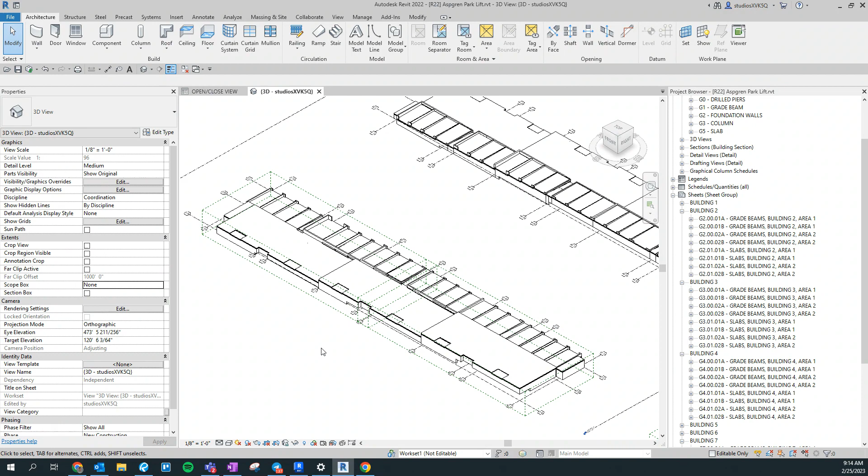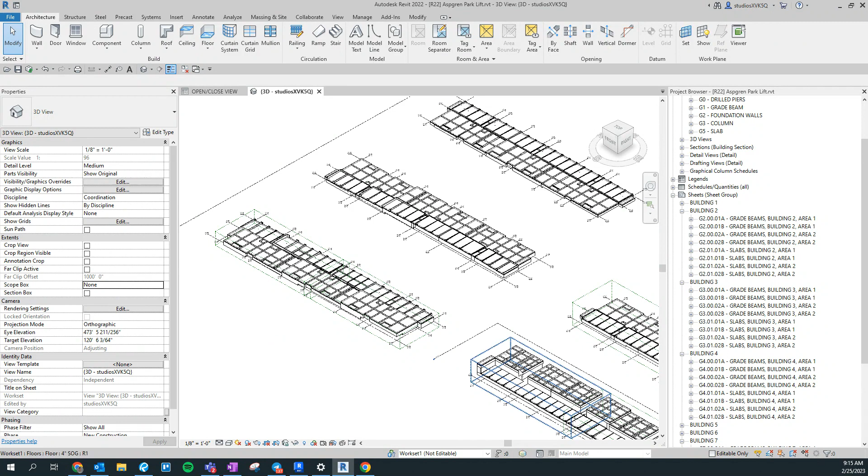So what we're going to be working on are these buildings that we like to call post-tension slab on grade with ribs. We've had a few projects where we've worked on these, but what tends to happen is that they're used at maybe apartment complexes where they're building a bunch of similar buildings, but based off site conditions like the ground level and how the soil slopes, there might need to be some differences.

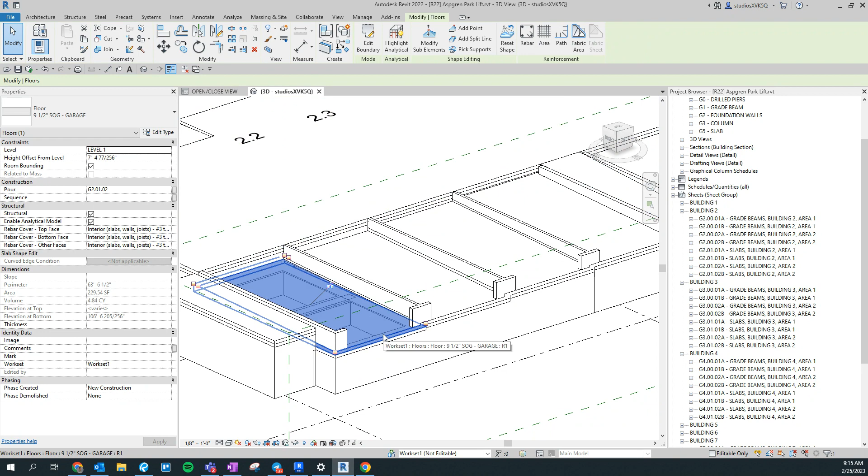So a project we worked on before was called Aspgren Park, and this gives you an idea of what some of these buildings might look like. What you can see here is usually there's a flat slab, and oftentimes it meets up with some sort of sloping slab. Usually what's happening is there's some sort of storefront, or probably in this case, ground floor apartments.

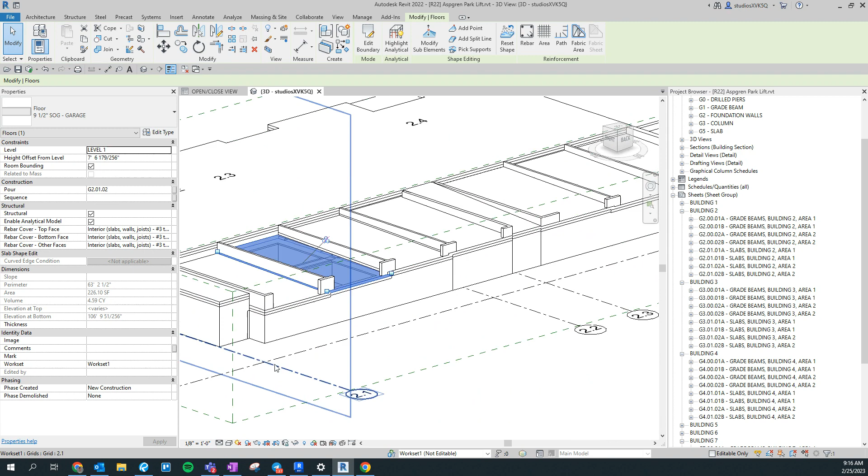But then what we have are these sloping slabs here, and these are for garages. You need to make sure, because there's oils and liquids in garages, that they're sloping. So usually you've got this flat slab and maybe it steps down to a garage, or maybe it slopes from the same place. So here it looks like it just kind of slopes from the same spot.

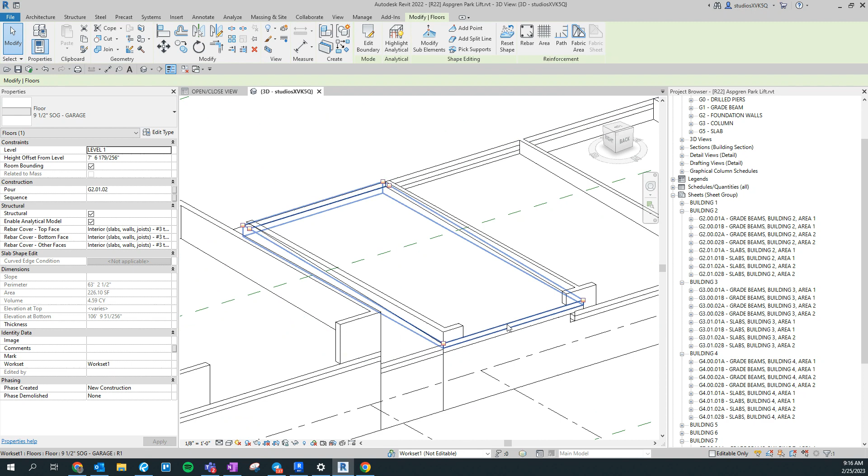Then what you end up having to have between those are curbs, say, between each garage. This can be a bit difficult to deal with, but essentially the purpose of the curb is that you want a wall on top of these to divide the garages into different pieces or rooms and spaces. But you need a flat area for that wall to sit on, so we put a curb in here.

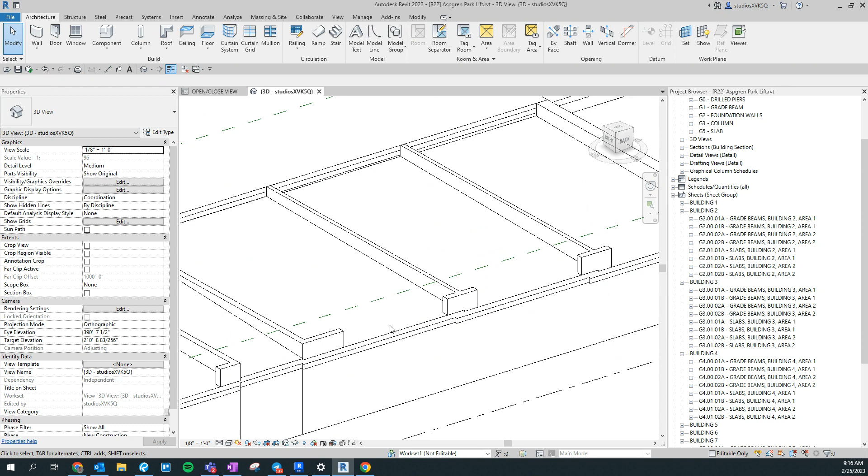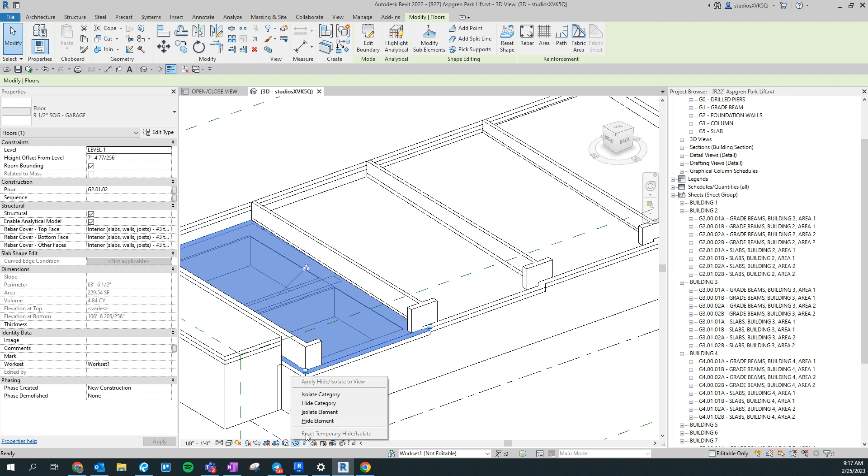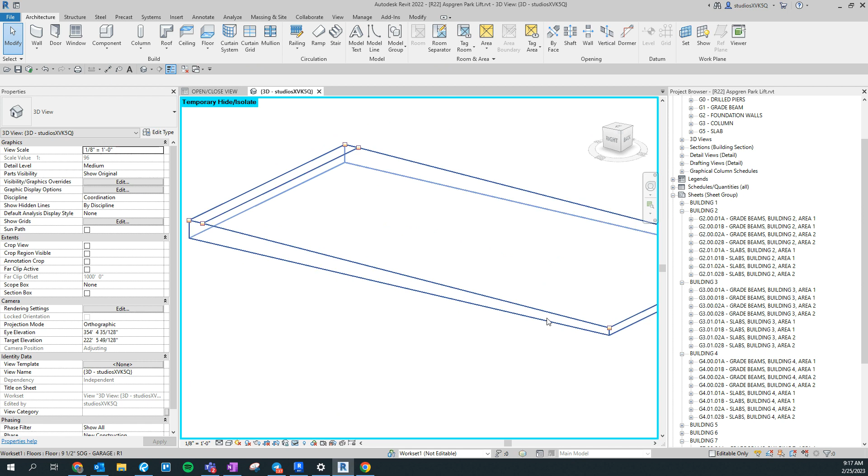Now, depending on the complexity of the building, what we had in this case was a slab of varying thickness, because we had a bunch of ribs underneath. Let me show you what I mean. If we isolate this element, we can see this is a lot thicker than it is over here. Usually the structural engineer will specify some minimum thickness, and that's this thickness right here. Then, in order to make the building easier to construct, we'll actually make the bottom of it flat and the top of it sloping.

Now, that's not always necessary. In the case of the building we're going to be working on here, Wesley Townhomes, it's not necessary, and we're going to have a non-variable, consistent thickness to our sloping slab here. But I do want to show you that this is something we often have to do.

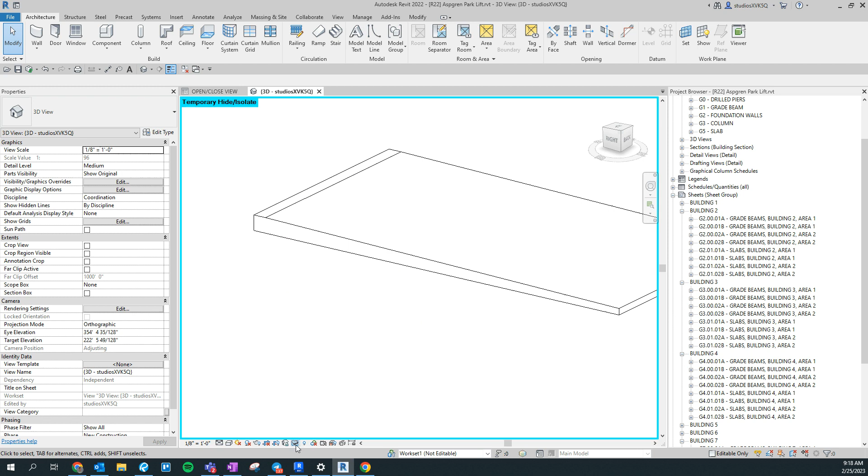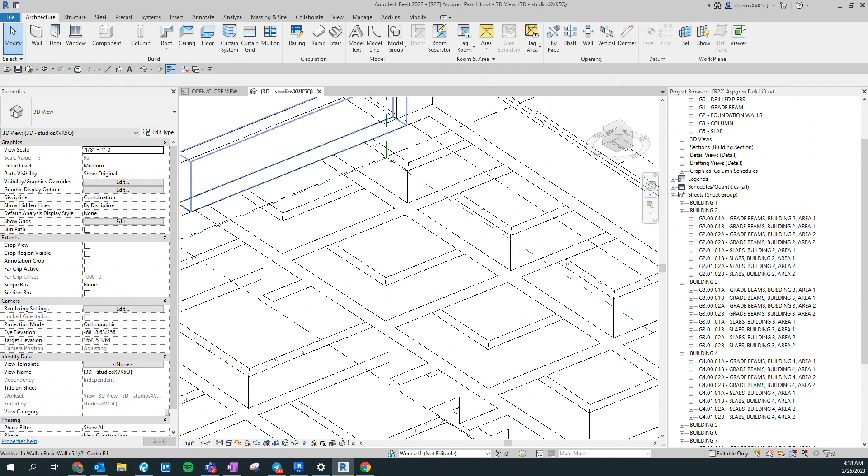The reason we did it for this job is because there's a large network of grade beams, ribs, and everything like that underneath. So if we tried to slope everything, we'd have all these ribs at varying heights on top, and it might be really difficult to pour.

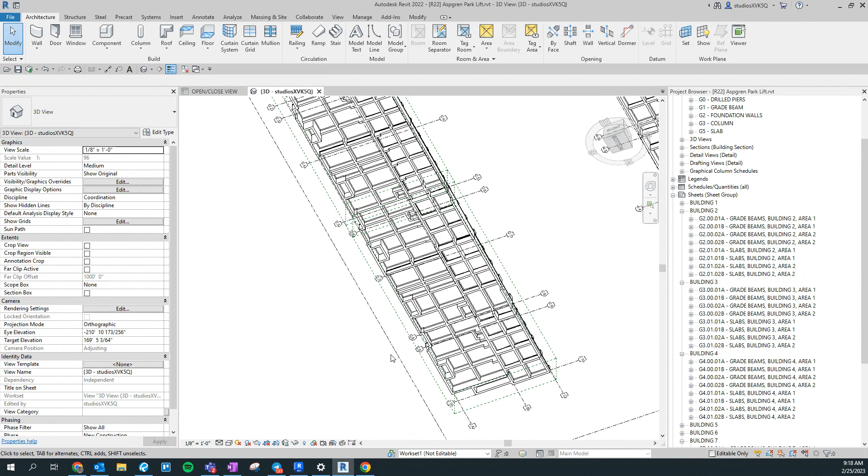It takes a lot of time and energy to do. So in this case, because we have a lot of interior ribs, by the way, we call these ribs on the interior rather than grade beams. I think it's because they make up a big network of grade beams and support. And because they're post-tensioned as well, they put some cabling in there, and the idea is it makes it a lot stronger. We don't need to go into the whole background of post-tensioning and the engineering aspect of all that.

So you can see we have jobs that are like this. We have curbs here. Maybe we'll get steps in the slab, sometimes big steps in the slab. Here, maybe it'd be easier to see if we make this shaded. Yeah, that's a little bit easier to see.

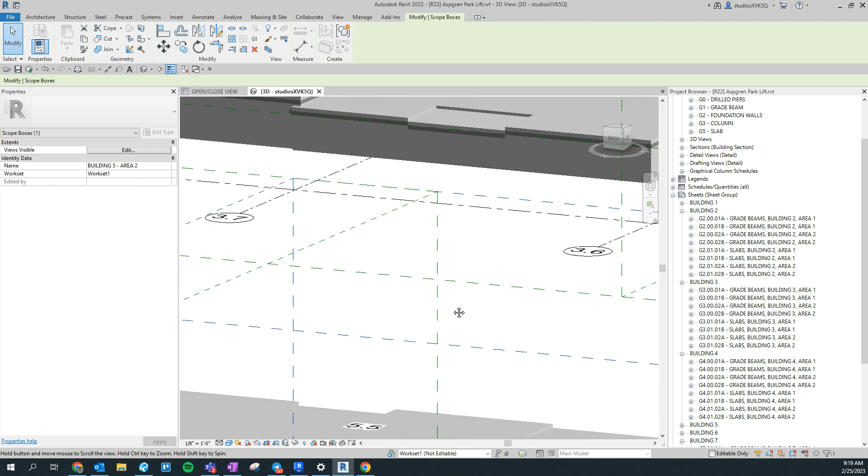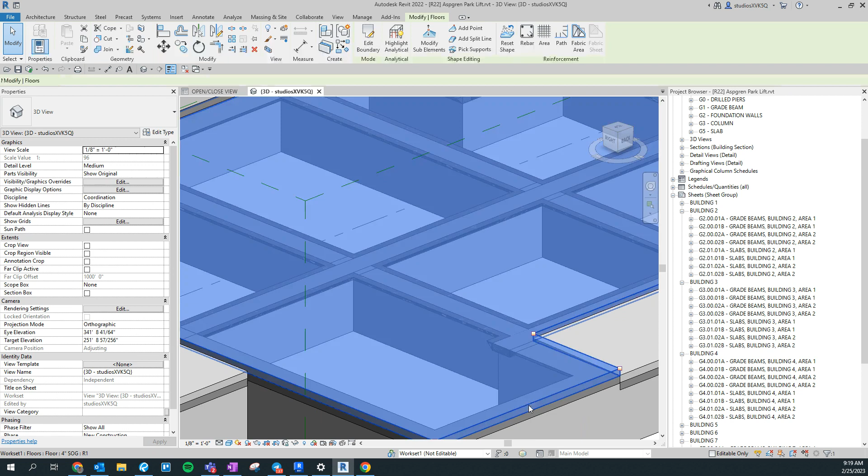One of the other big things we have is underneath the slab, what you can see are these little areas right here, like what I'm selecting at the moment. These are thickened slabs. The purpose is that we don't want the slab, at its thickness - I think the slab is 4 inches thick - to sit directly onto the grade beam, where you've got like a 90-degree transition at the grade beam.

So what you can see that we do, let's go ahead and select one of these grade beams as well, just to isolate these.

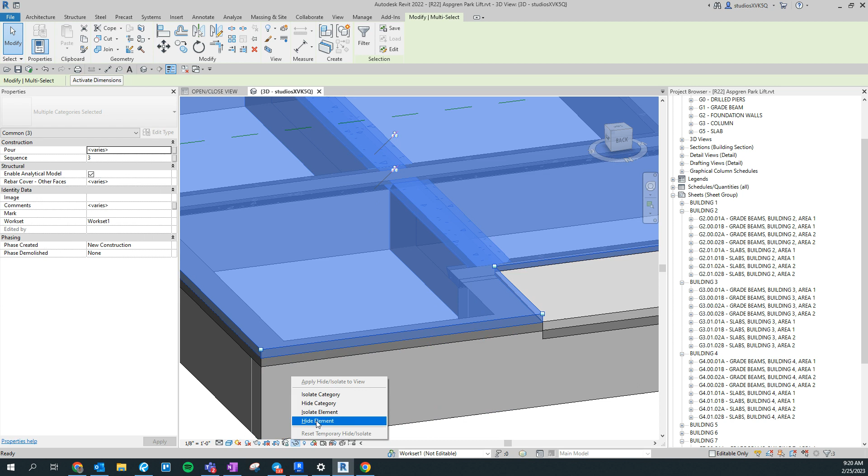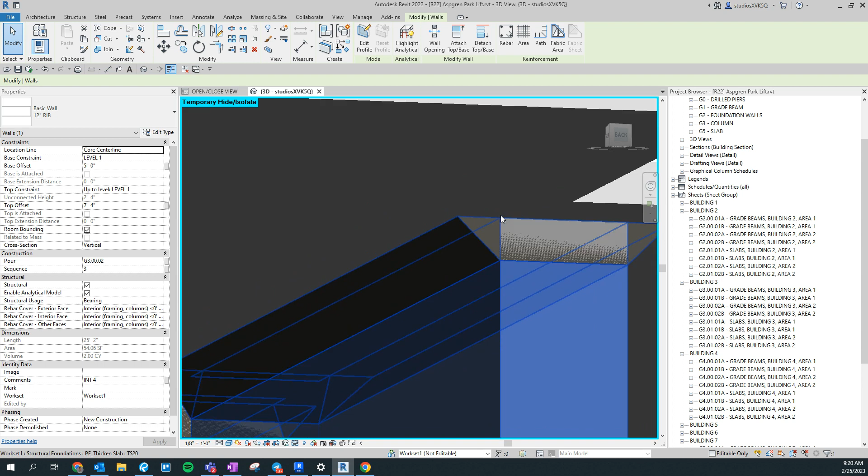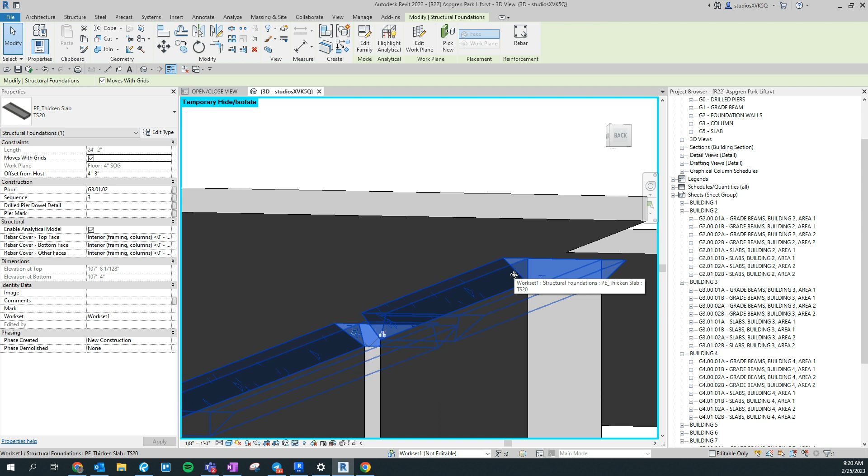So what you can see that we do is we have a little trapezoidal or triangular section, and this is poured with the slab. This is about making the connection between the rib and the slab stronger. Because if you do a 90-degree connection, if you have a background in structural engineering, you'll know this creates what's called a stress concentration, and it can break a lot easier. But when we make it a 45-degree angle, it's a lot better. Actually, the best way is to have a curve, but that's extremely difficult to pour. So this is a good way to get it done and still keep it strong.

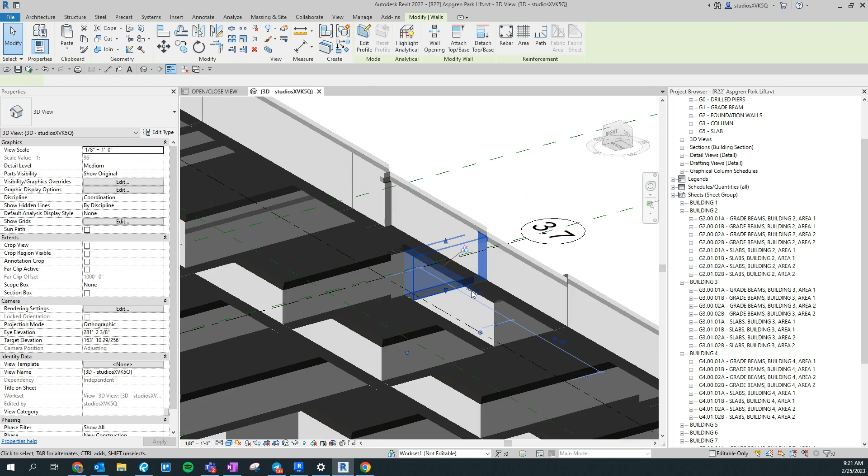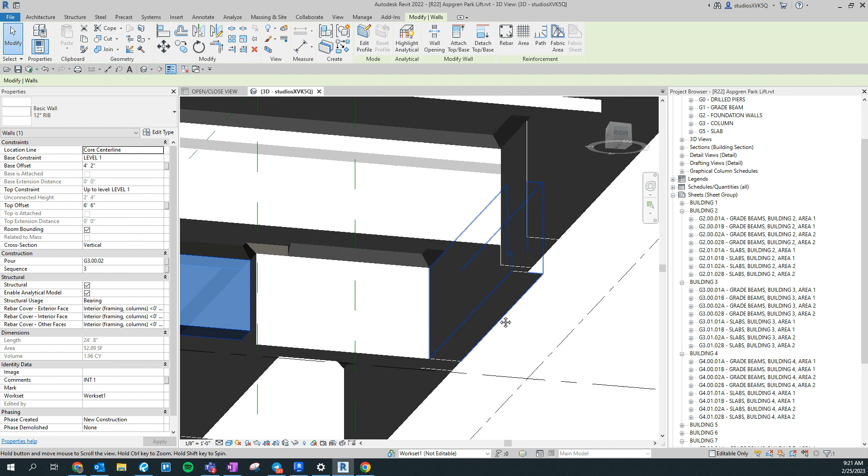So this is the general setup of these systems. And there's one other thing I want us to take a look at. What you'll notice in some of these places is that these interior ribs are not as deep as the exterior ribs. So the ones on the inside are not as deep as the ones on the outside. Sometimes they match up, or in certain places we make a few of the interior ones as deep, but you can see there is this interior one that steps down. So this depth of rib is needed for the structural strength, and to actually make everything strong, this is all that's needed.

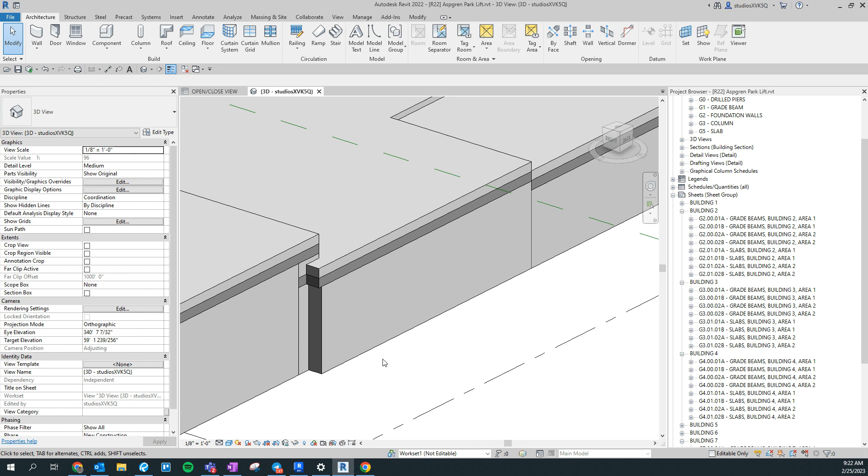But when we're especially farther in the northern hemisphere, in places where we have to deal with snow and frost and really freezing temperatures, one of the things we have to worry about is what's called frost. Frost is basically when the ground freezes. The problem is the ground will freeze and thaw and freeze and thaw, and it will push our structure. If it's not deep enough, it'll push our structure up out of the ground a little bit here and there. And as we know about concrete, if it moves a little bit, it's going to start to break, and we're going to get cracks and lose our strength, structurally speaking.

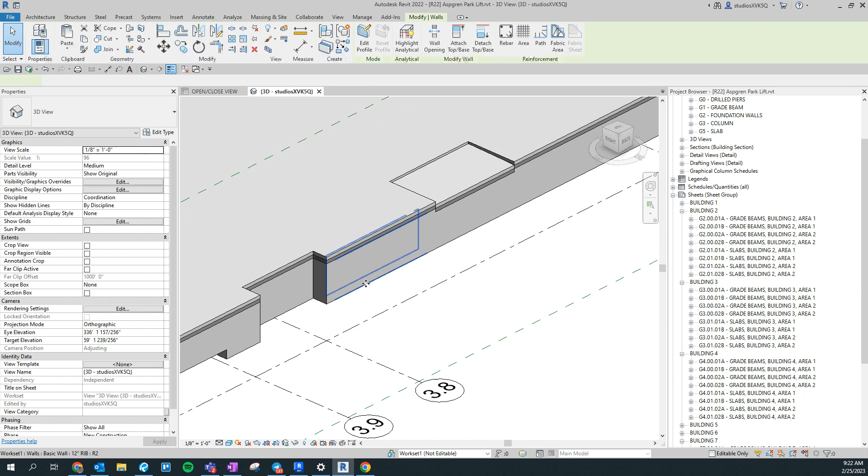So what we do to combat that is on these areas that are on the outside, close enough to the outside of the building where they have to worry about the freezing and thawing and the frost, we make them deeper so they can reach that frost depth. Usually that depth is about 3 foot, or at least 3 foot, maybe 3 foot six, depending on the area and the design by the civil engineer or structural engineer. Usually that's 3 foot six below what the grade is. And let's remember that grade is where the soil is, not necessarily the top of the slab. It might be, but not necessarily.

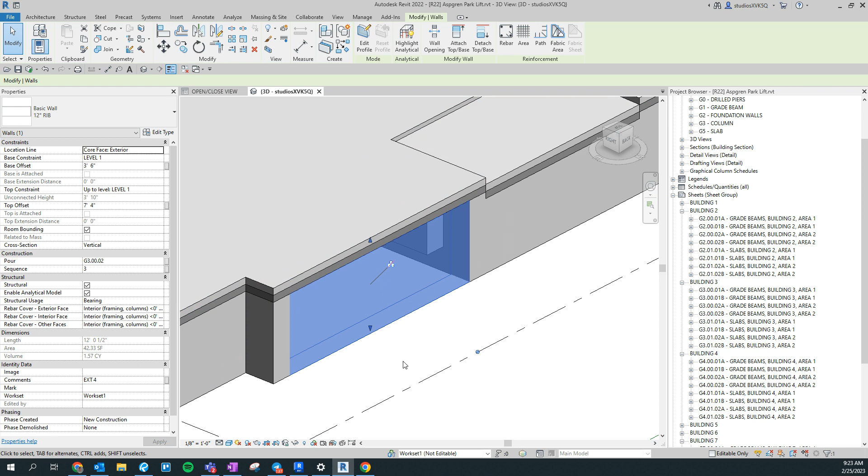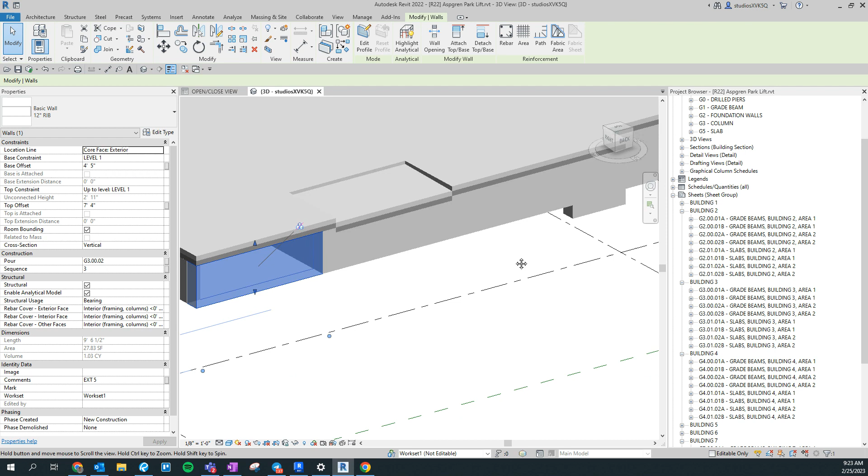So we usually have to get this at least 3 foot, or 3 foot six below grade, below where that soil is. And it's better to be a little conservative and have some extra space there. So even if the grade is up really high, it's better to have a flat bottom because it's a lot easier and cheaper to construct than to slope the bottom with the grade. So as a summary, interior ribs are usually not as deep as exterior ribs because the exterior ribs have to protect the interior ones and all the structure inside from frost and freezing.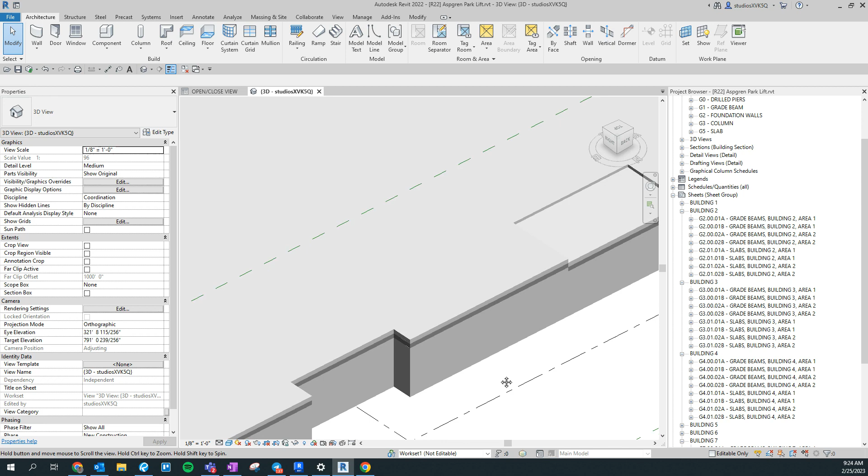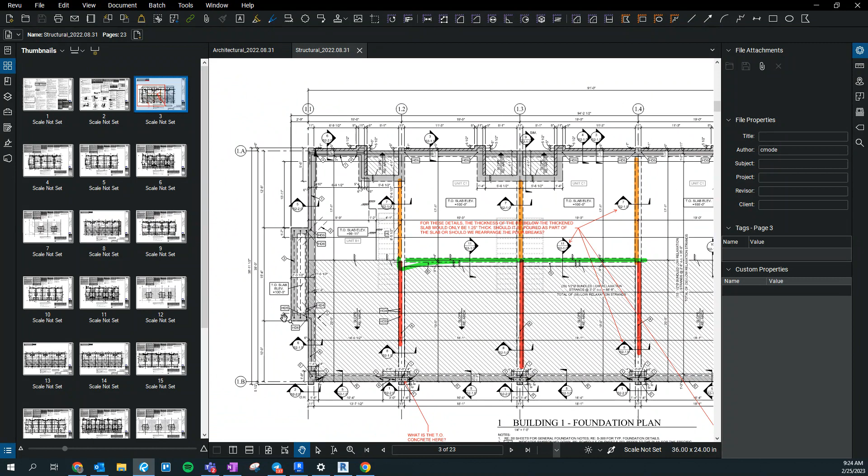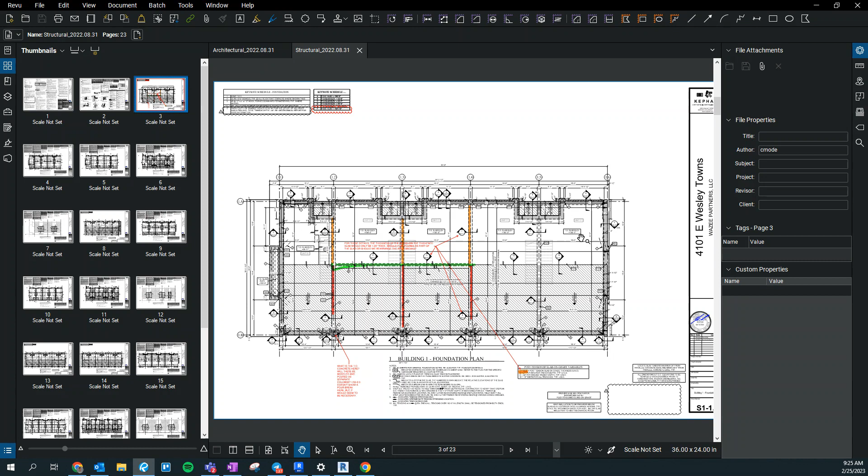Now the job we're going to be working on is this Wesley Towns. It's not nearly as complex as Aspgren Park. Thankfully we do have some interior ribs here and things like that, but for the most part these are smaller buildings. They're not stepping nearly as much, there's not as many of them, and there's just these exterior ribs. We'll go through all of these in our set of training videos here. The purpose of all of this is so that we get used to reading design drawings, building these buildings, and going through the sheet setup and annotation of all of this. So with that in mind, this is the approach we're going to take, and we'll get into the design itself in the next video.

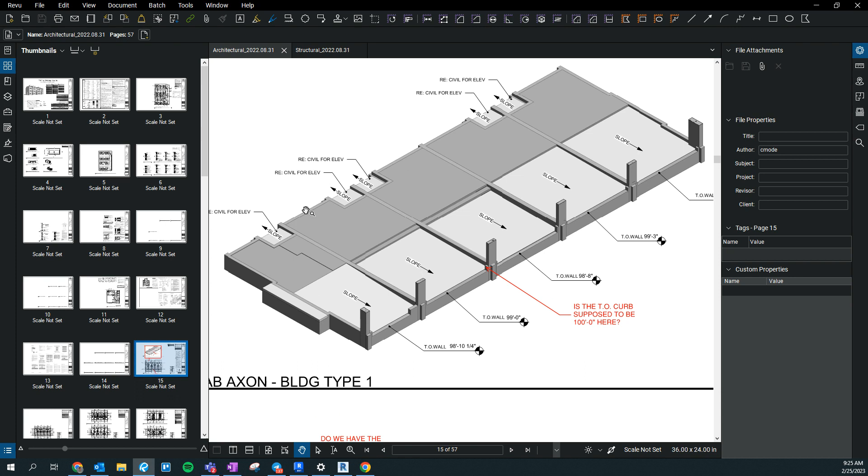Oh, and you can also see a little bit more here about, thankfully, this architect actually built a model. We're going to have to go and build another model because theirs is not exactly correct, and we also were not sent the model for this project. But you can see generally how this is looking: flat slab with some sloping garages. So next video, we're going to get into starting to read the design drawings a little bit better.